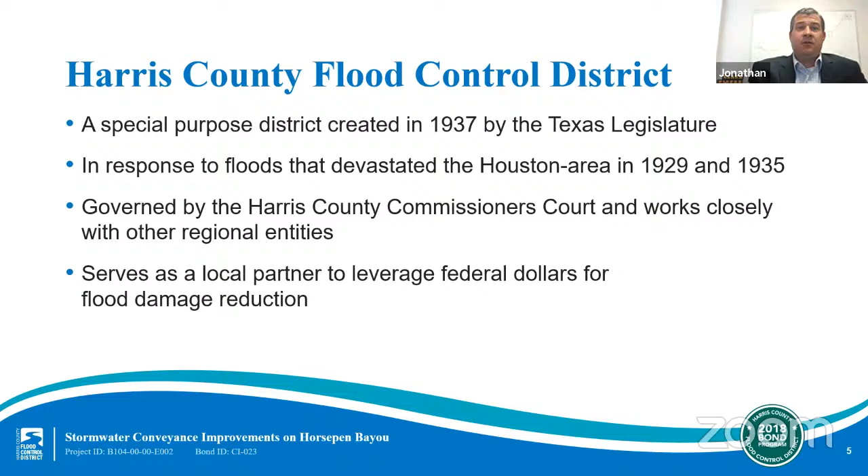The mission of the Harris County Flood Control District is to provide flood damage reduction projects that work with appropriate regard for community and natural values. One of the most difficult challenges we face is constructing effective projects that are sensitive to community and natural values in a highly urbanized area.

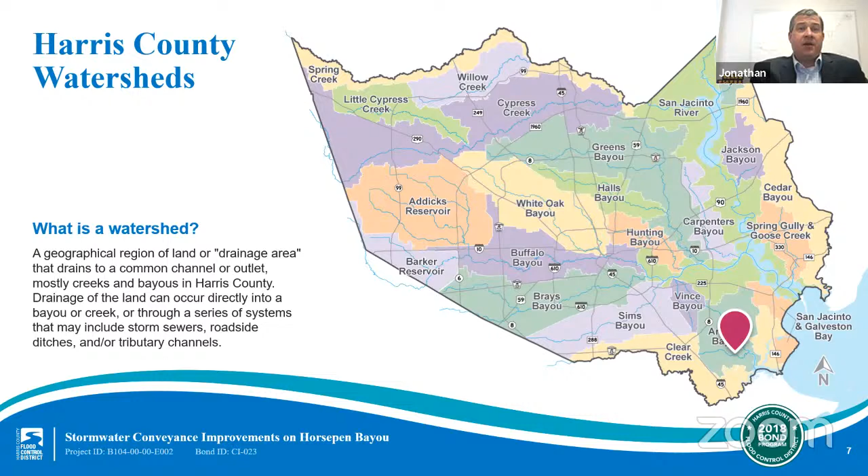Harris County includes 23 main watersheds, totaling approximately 1,800 square miles and more than 2,500 linear miles of channel. 2,500 miles is approximately the distance from New York to California. A watershed is a geographical region of land that drains to a common channel or outlet. Each watershed has its own unique characteristics and needs. The project we're presenting tonight is in the Armand Bayou watershed, located in southeast Harris County.

Our area is flood prone, and here are some reasons why. We do receive extreme rainfall, including that from tropical storms and hurricanes. We have flat, slow draining land and clay soils that do not soak up excess rainfall quickly.

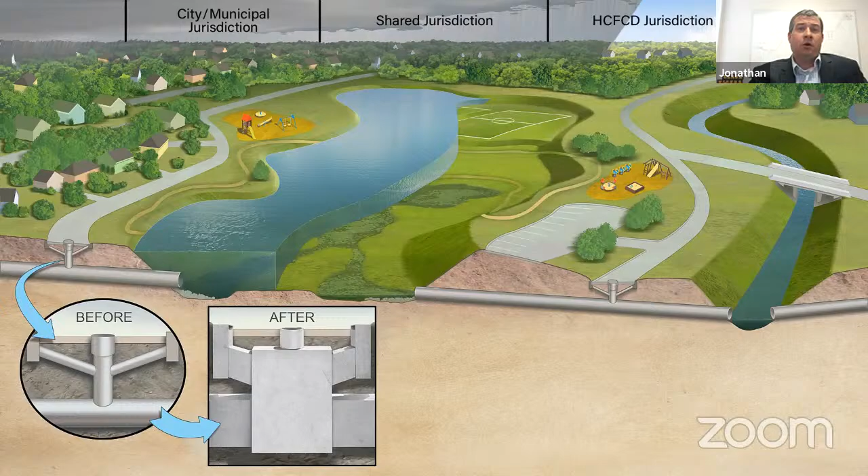On August 25th, 2018, Harris County voters approved $2.5 billion in bonds for flood risk reduction projects. This vote followed a series of meetings across Harris County and each watershed, which resulted in a list of what is now 181 bond projects. As of August 25th, 2021, every project included in the 2018 bond program has been initiated, including 8 projects in the Armand Bayou watershed.

A total of more than $1.35 billion in partnership funding has been secured so far to stretch the 2018 bond program even farther. The actual timing of each individual project will depend on a variety of factors, including environmental permitting, right-of-way acquisition, and utility relocation, and in some cases, requirements of a particular grant. That said, project lists and projected schedules are updated regularly on our website.

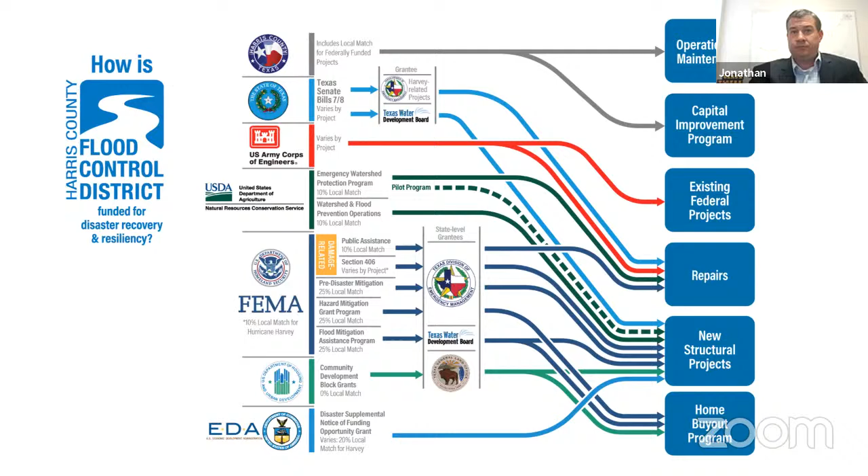We'll now move into the part of the program that is specifically about the Armand Bayou watershed and stormwater conveyance improvements on Horsepen Bayou.

The stormwater conveyance improvements on Horsepen Bayou project is one of 8 projects in the Armand Bayou watershed included in the 2018 bond program. The Armand Bayou watershed is located in southeast Harris County and encompasses portions of the cities of Houston, Pasadena, Deer Park, LaPorte, and Taylor Lake Village.

Armand Bayou flows in a southward direction from its headwaters near Deer Park to its mouth at Clear Lake. The watershed covers about 59 square miles and has 5 primary streams, including Horsepen Bayou. There are about 89 miles of open streams within the watershed, including the primary streams as well as the tributary channels. Sizable floodplains exist in areas along the main channel and in Pasadena, Deer Park, and LaPorte. The watershed is also vulnerable to storm surge from hurricanes or tropical storms.

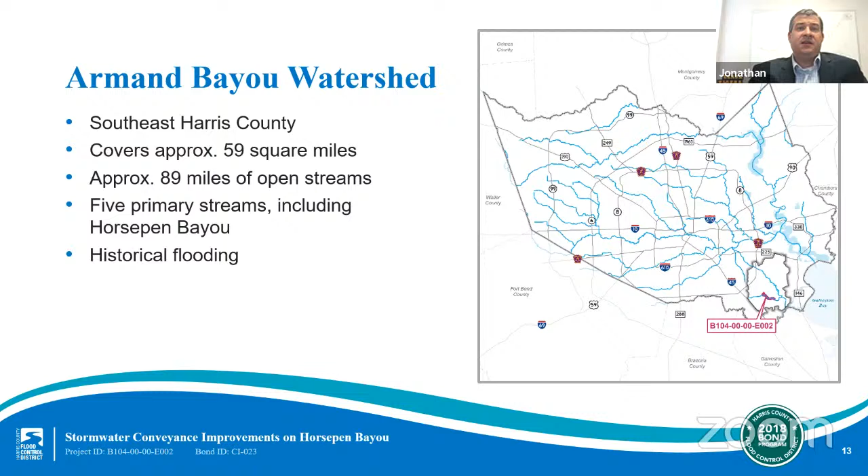Regional planning is important on Armand Bayou due to past structural flooding. For more on the Armand Bayou watershed planning study, please visit the watershed webpage at www.hcfcd.org/Armand.

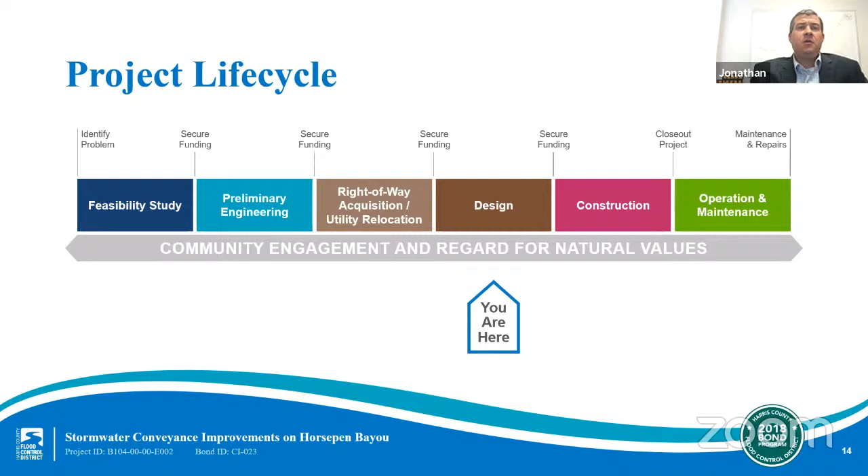Since then, we finalized our engineering analyses, incorporated your feedback, and selected the alternative that best and most efficiently meets our mission of providing flood damage reduction projects that work with appropriate regard for community and natural values. The project has now advanced to the final design stage, represented by the arrow, which is what we will be sharing with you today. Before we do so, I'd like to take a moment to recap the project history.

In July 2020, the Flood Control District hosted a virtual community engagement meeting sharing details and proposed alternatives determined during the preliminary engineering stage of the project lifecycle. During this stage, the Flood Control District evaluated cost-effective improvements along the main stem of Horsepen Bayou and tributaries

Our analysis used current rainfall expected in a 0.2% annual chance event or 500-year storm. This data is being used as an approximation of the future 1% annual chance event or 100-year storm expected from the ongoing MAAPnext floodplain map update effort.

For more on MAAPnext, please visit its website at www.MAAPnext.org, and that's MAAPNEXT.org with 2 A's.

Alternatives were identified and presented as potential conveyance improvements to Horsepen Bayou, and that's alternatives from the preliminary engineering report.

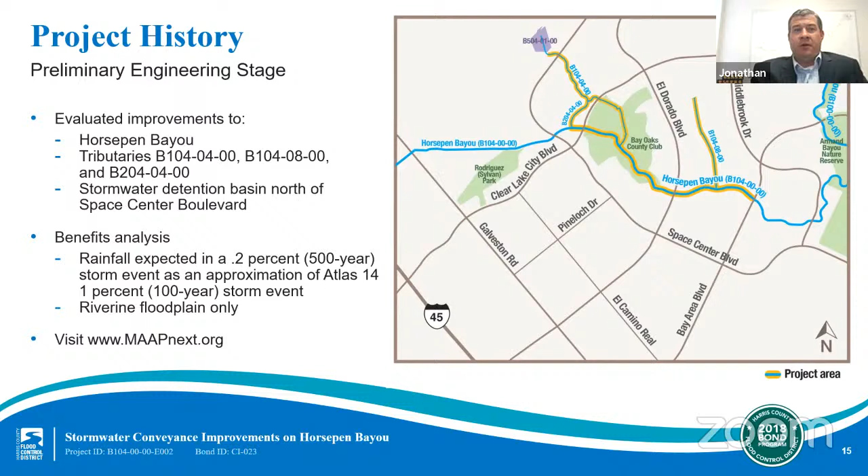The recommended alternative from this process was the widening of Horsepen Bayou by an average of 20 feet, adding approximately 10 feet to both sides of the channel. This alternative was selected as it provided the least impact to the residents, could be accomplished using existing right-of-way, and provided the most benefit for the estimated cost to construct.

While the preliminary engineering report did study other tributaries of Armand Bayou, as mentioned before, it was determined that these tributaries had the necessary conveyance capability and as such did not warrant improvements at this time. This is because peak flows and water levels in the tributaries tend to be governed by the water level in the B104 main channel.

It's important to note that following the virtual community engagement meeting, the Flood Control District conducted additional analysis for the preliminary engineering report based on comments and feedback received from the community. This additional work included analysis of the Garden Creek Way Bridge and was completed at the end of 2020.

In spring of 2021, Harris County Commissioners Court accepted the preliminary engineering report and authorized the design and construction stages of this stormwater conveyance improvements project.

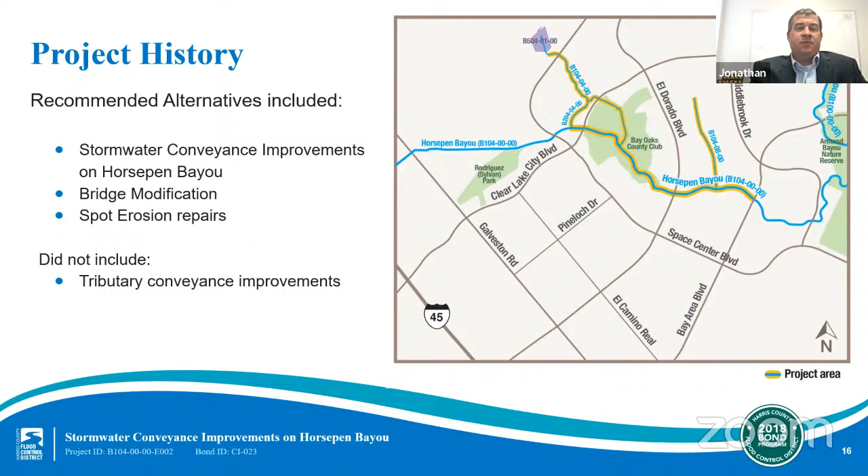Here's another look at the current project area. As mentioned previously, the limits for this project have been refined following the preliminary engineering stage. The updated project area now involves approximately 3 miles of Horsepen Bayou between Bay Area Boulevard and Clear Lake City Boulevard, as highlighted in yellow on this map.

Horsepen Bayou is located east of Galveston Road, which is State Highway 3, draining an area around Ellington Field and Clear Lake City. Horsepen Bayou is a man-made channel.

However, it has become naturalized over time, and federally protected wetlands can be found near the water surface. Design is now underway for this project, which aims to reduce flooding to nearby neighborhoods through stormwater conveyance improvements to Horsepen Bayou. Key project components include, first, the widening of Horsepen Bayou by an average of 20 feet and spot erosion repairs

between Bay Area Boulevard and Clear Lake City Boulevard. Second, the creation of a maintenance access shelf below the top of the channel bank along portions of the channel. And third, modifications to the Garden Creek Way Bridge over tributary B204-04. Let's take a closer look at these improvements.

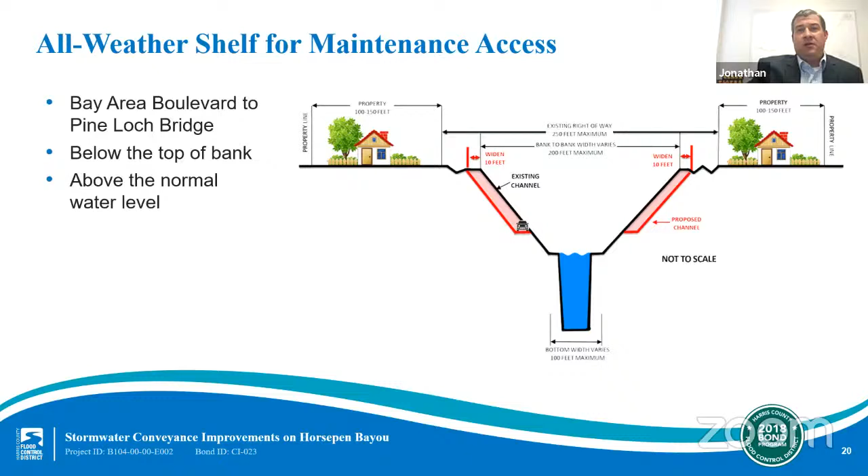At this location, there will be enough access for regular maintenance to resume at the top bank. In doing so, the Flood Control District accomplishes the project objectives of widening the bayou while also providing for maintenance access in the most cost-effective manner.

The other key component of the Channel Conveyance Improvement Project is modifications to the Garden Creek Way Bridge over tributary B204-04. The new bridge will replace box culverts to help increase stormwater conveyance and reduce flood risks.

While bridge modifications were not part of the originally recommended alternative for the Horsepen Bayou Conveyance Improvements Project, we heard a call from the community to address issues with this bridge. This bridge will be packaged separately for bidding, and this will enable the Flood Control District to proceed with construction on either project without the other delaying the overall timeline.

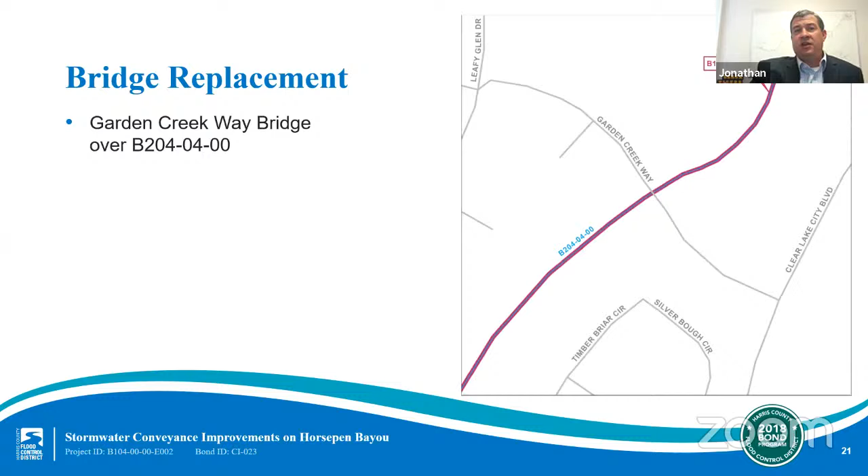As a result of this project, the anticipated benefits include approximately 68 acre-feet of additional stormwater storage volume within the project area. An acre-foot is a unit of measurement: 1 acre of water, 1 foot deep. Additional stormwater storage volume results in a reduction of the Atlas 14 1% or 100-year water surface elevation in the project area of approximately 1/10 of a foot to 1/2 a foot, or about 0.13 feet to 0.46 feet.

This will reduce the threat of flooding for an estimated 256 homes in the 0.2% or 500-year floodplain, which we are using as an approximation of what is expected to be the new Atlas 14 1% or 100-year floodplain. The Garden Creek Way Bridge modification results in a water surface elevation reduction of approximately 1/2 foot to 1 foot upstream of tributary B204-04.

We also want to take a moment here to mention encroachments. As part of this project, the Flood Control District will address encroachments along Horsepen Bayou. An encroachment is defined as unauthorized use of Flood Control District right-of-way. Encroachments can obstruct channels, prevent needed maintenance, or interfere with important flood risk reduction projects. Examples include fences, stored items, landscaping, or other structures such as a shed that are placed on or extend into the Flood Control District's right-of-way.

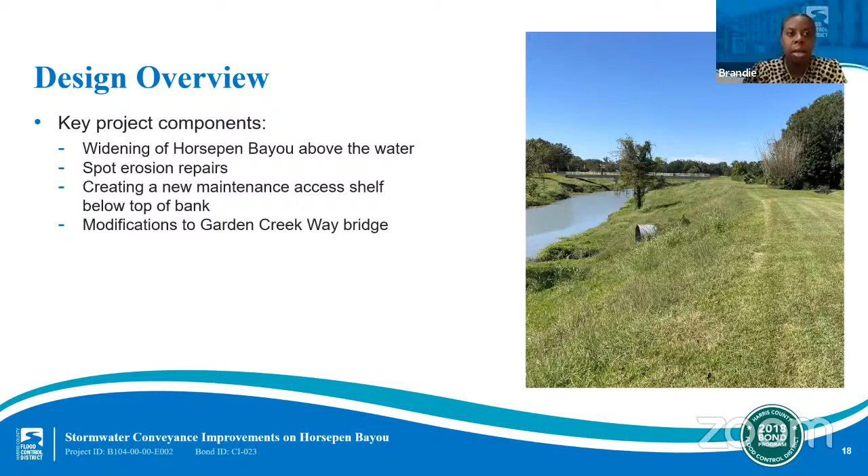Another one for you, Brandy, as well. Will the project have any impacts on the newly constructed El Dorado Boulevard? There will not be any impacts to the El Dorado Bridge, as we took into account and were made aware of the design of that bridge. So we incorporated those plans into our design to make sure we wouldn't negatively impact that project.

We are receiving a few questions about other parts of the watershed outside of this specific project area. Obviously, this meeting is to talk about a very specific project. If you have concerns about maintenance, there is a service request form located at hcfcd.org, in the top toolbar. We encourage you to submit maintenance requests there. As I mentioned earlier, any questions not addressed during tonight's session we will follow up on following the close of the public comment period. Our next question is for you, Jonathan.

Why are encroachments an issue now if they haven't been in the past? That's a good question, and I know that can be frustrating. But following Hurricane Harvey and with additional funding from the 2018 bond program, the pace of new flood risk reduction projects by the flood control district has really greatly increased, and this has brought the issue of encroachments to the forefront. The flood control district's encroachment removal program exists to enforce access to our rights of way, which, as we mentioned in the first couple of slides, covers more than 2,500 linear miles of channel under our jurisdiction. This encroachment removal program was created as a result of House Bill 3782, approved during the 85th legislative session. Encroachments can obstruct stormwater conveyance and make it more difficult to build and maintain important flood risk reduction projects. So with the sheer volume and increase of our work and projects lately, it's really brought this issue to the forefront and enabled us to enact this encroachment removal program.

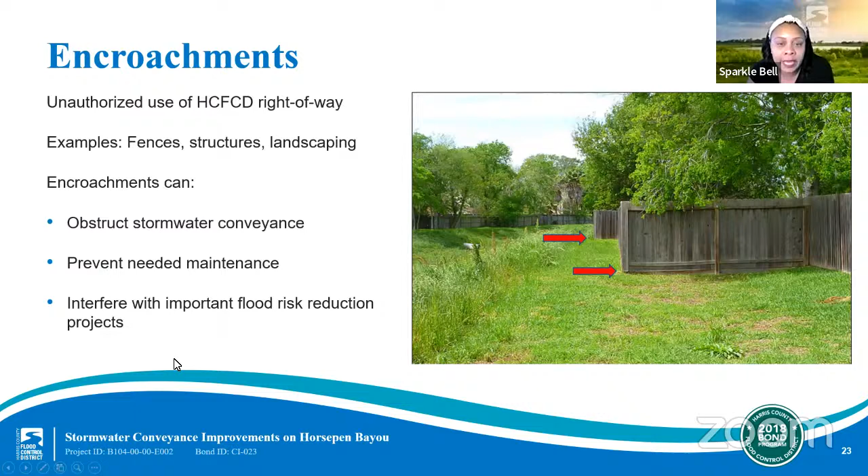Those questions are continuing to come in. We have another question, and I'll let Brandy take this: are there plans to connect Horsepen Bayou with the Exploration Green Stormwater Detention Project? I'm not real familiar with the exact location of the Exploration Green Stormwater Detention project. However, this project is a standalone project that will only be within the project limits shown on your screen now, which is just north of Clear Lake City Boulevard all the way down to Bay Area Boulevard.

Yeah, and I can add to that a little bit. I'm looking through a map here. So the Exploration Green project, I believe, is a detention basin project or projects up on the tributaries. While these aren't technically directly related, they do somewhat work hand in hand. Any detention project that gets done by the flood control district or another entity, such as a city or municipal utility district, is a good thing. The waterways are connected, so those detention projects are going to help overall flood risk reduction in the area.

If you're asking about connection of these facilities or projects via trails, that's something that would have to be determined in the future. I think we talked about it a little bit ago, maybe in the first question to Brandy about potential for hike and bike trails.

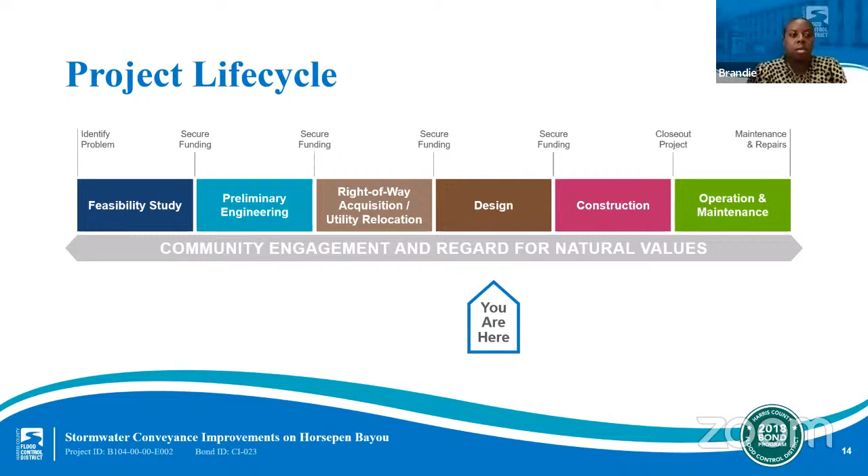Yes, it's likely that some trees will need to be removed to accommodate the widening of the channel section. We understand that trees are very important to the community and to the natural features of the channel. However, if trees impact the access needed for construction, we will identify those trees so they can be removed and or possibly relocated while construction is going on.

We're always open to opportunities to replace trees that have to be removed due to access, which would be followed up after construction by our infrastructure department. There are several ways we could implement those trees, and we'll make sure that any trees we replace don't impede future access needed for maintenance. If trees don't necessarily have to be removed, we take precautions like trimming the lower parts so trucks can get by, or putting up a buffer fence to protect those trees.

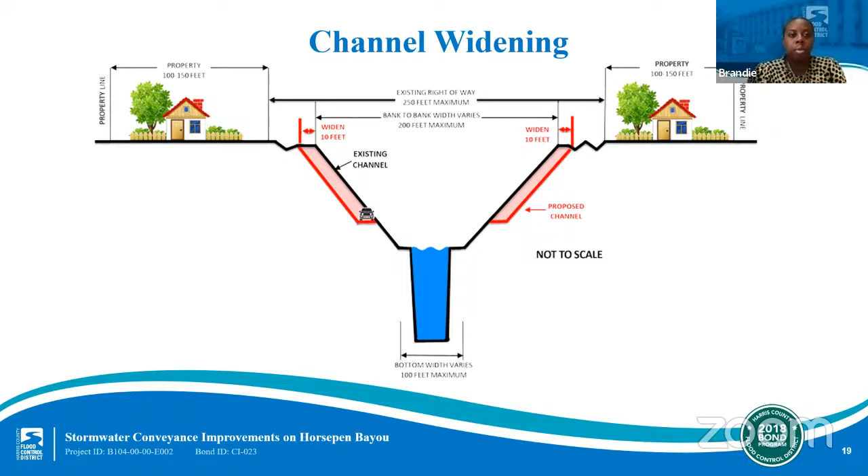Identifying which trees will happen right before construction, and there's really no specific map that we typically provide. However, I will definitely take that back to the project team to see if that's something we can possibly provide on the website, identifying trees in areas that could be potentially impacted.

We've also received a question from a resident concerned about vehicles and motorcycles along the bayou, wanting to know how that's being addressed. Jonathan, will you take that one? Sure, I can take a stab at it since that is in our flood control district right of way. You could go onto our website and send us a comment for public input or even a service request, and that might help us get through to the local precinct or constable's office, depending on what would be appropriate there.

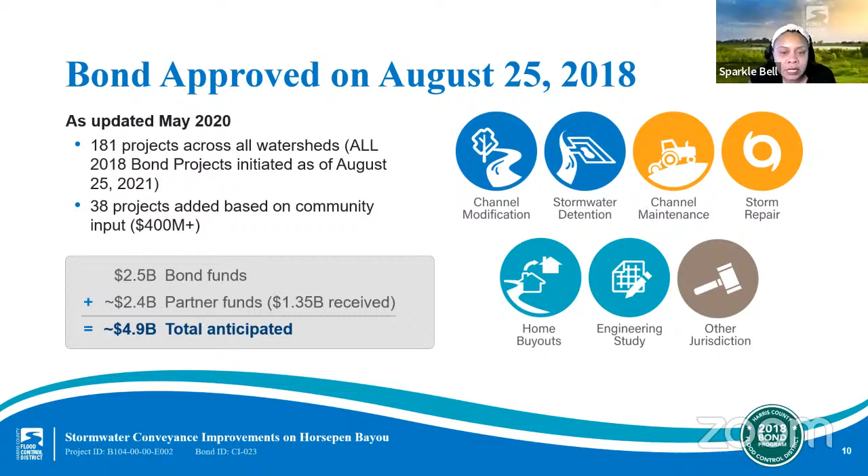All right, and the next question is for Jonathan as well. When can we expect to see construction start?

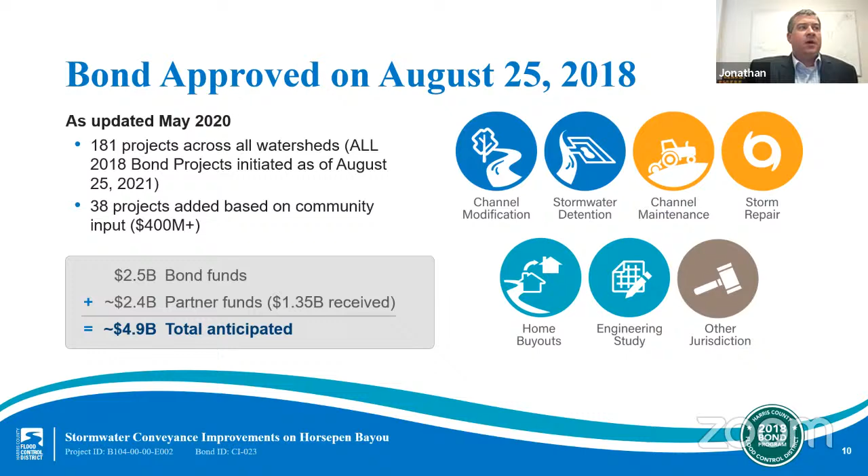Sometime in early 2023. Brandie talked a little bit about the timeline for finalizing design. Once we get those construction plans finalized around the end of the year, we go through our bidding process. During that process, when we publicly advertise the project and let contractors bid on the plans, there could be a couple of changes in there. That always takes time because there's a certain period to publicly advertise and receive bids, and then put our contract documents together following that. So that puts us beginning construction sometime in early or spring of 2023.

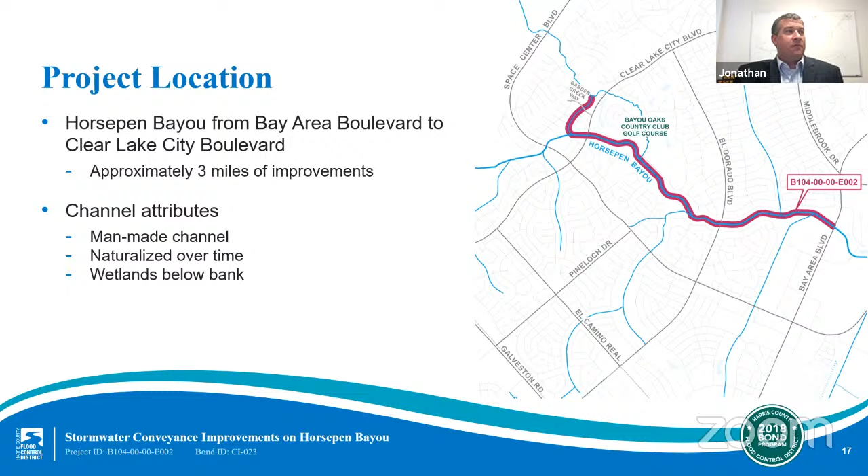First, we certainly can't tell you that you won't flood again, or that this project is going to prevent anyone from flooding. But in general, this project will reduce the risk of flooding. As I look over to Brook Forest Drive, we're right there along Channel B104. I'd say yes, this project does help Brook Forest Drive, though I can't tell you exactly how much. It may depend on exactly where your address is along the street. But yes, this project will provide flood risk reduction for homes along Brook Forest Drive.

All right, thank you for that. Jonathan, we have a question about water surface elevations and what it means when we say the project will lower it by a certain amount. Can you explain what this means, what is included, and how it's calculated?

So that's what we look at trying to reduce, that peak level or peak storm event, or peak water due to the storm event, because it's that peak or highest water surface elevation that is going to do the flooding of the area. So we look to reduce that.

We propose these projects to lower that peak, and that's why we give the benefits in terms of a water surface elevation reduction, to say that before the project, the peak water surface elevation in the channel was here, and after the project, the peak water surface elevation in the channel is down lower, and that's the benefit to the project. I hope I explained that well.

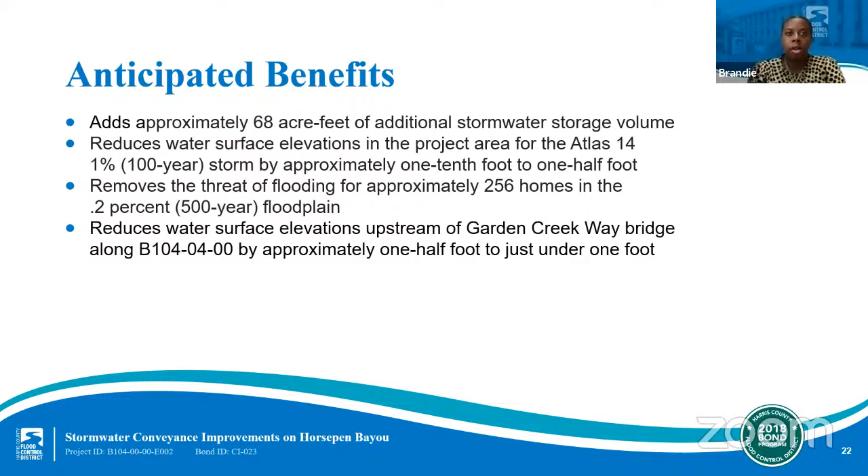So in order to lower the water surface in the channel during significant rain events, we created additional storage within the project limits. Replacement of the culverts crossing at Garden Creek Way will improve conveyance of flows through the B20404 diversion channel, lowering the water surface elevations upstream of Garden Creek Way.

This improved flow condition at the confluence of B20404 and Horsepen Bayou is mitigated by the storage added into the Horsepen Bayou system from B20404 downstream to Bay Area Boulevard.

All right, and I think this will be our final question of the night. A resident wants to find out exactly how the project will affect their home, and when that will be determined. Our final question will be the start and end point of construction. Brandie, if you'll take both of those, please.

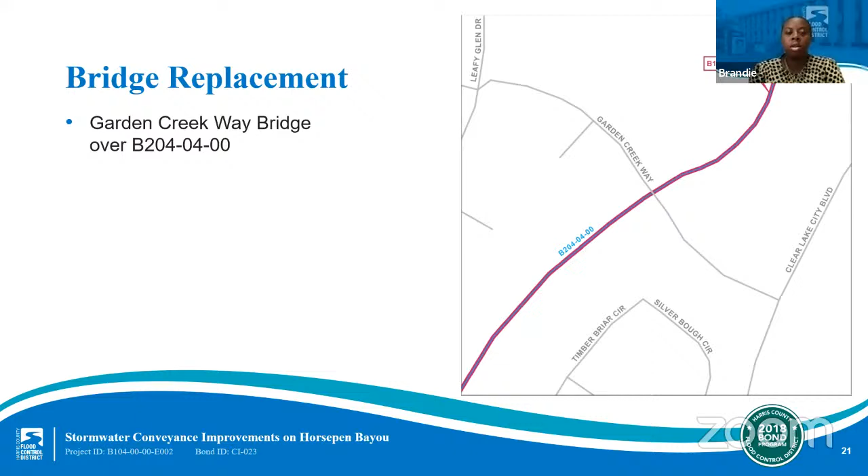Yes, I'll start with the project limits for this project. We'll start just north of Clear Lake City Boulevard, down to the downstream limits, which will be Bay Area Boulevard, which can be shown in the slide. Here in the picture, the highlighted purple line will be our project limits for this particular project.

As far as being able to determine how this project is going to affect a specific home, as someone mentioned before, they mentioned a street. We can tell you if that street or area is within the benefit area for this project. But a rule of thumb is usually the houses closest to the channel could see the most impact, or the most benefit from the channel improvements we are doing within the project area.

Right, and then just construction starting and end points, and we'll wrap. Yes, so the starting endpoint is what's shown on the screen, highlighted in the purple line. It's starting just north of Clear Lake City Boulevard on the B20404 channel, and it will end at the Bay Area Boulevard bridge, just upstream of that bridge. Approximately 3 miles of improvements.